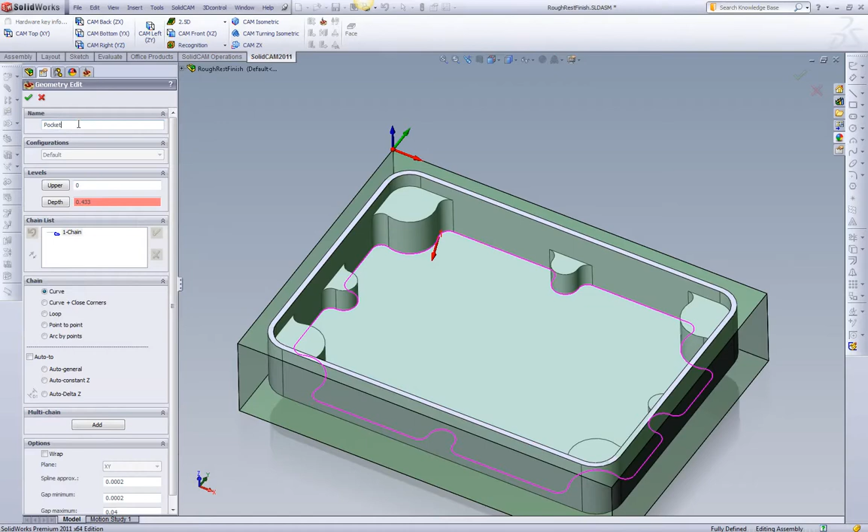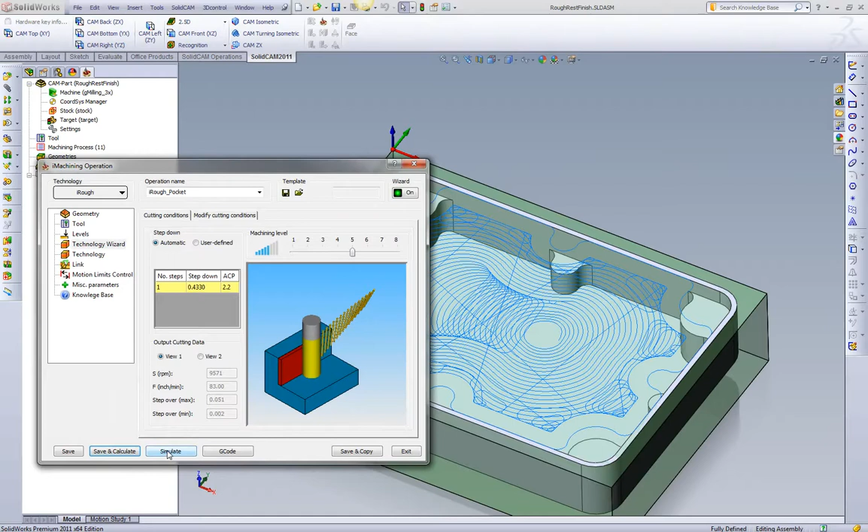We'll go select our tool. The first tool we're going to use is a 1/4 inch end mill. And we're going to use level 5 in our iMachining wizard. We'll take a look at the toolpath. Here we can see it roughed out. We'll take a look at it in Solid Verify.

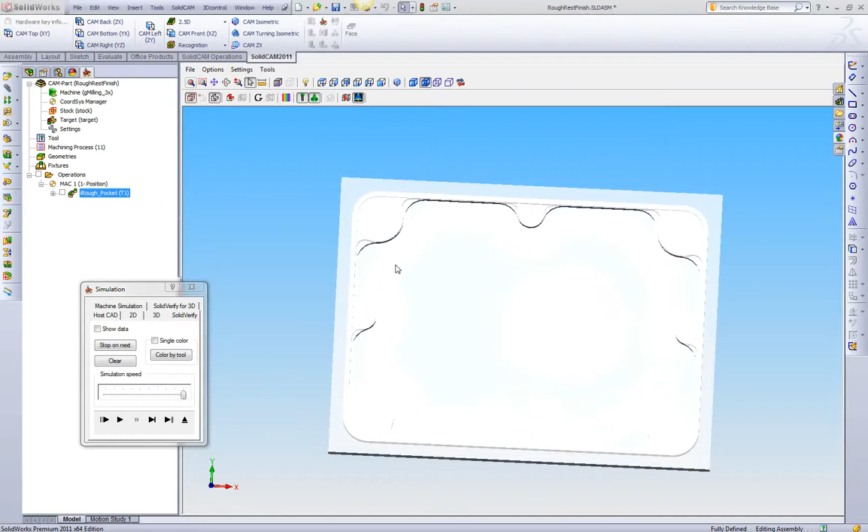If we look at our finished model, we can see that we have material in all the corners and also on the wall. So if we want to rest rough this operation first before we go to finishing, all we do is click Save and Copy. We switch our technology to rest. We go grab our smaller tool. We're going to stick with the same level 5 in our wizard, and we calculate.

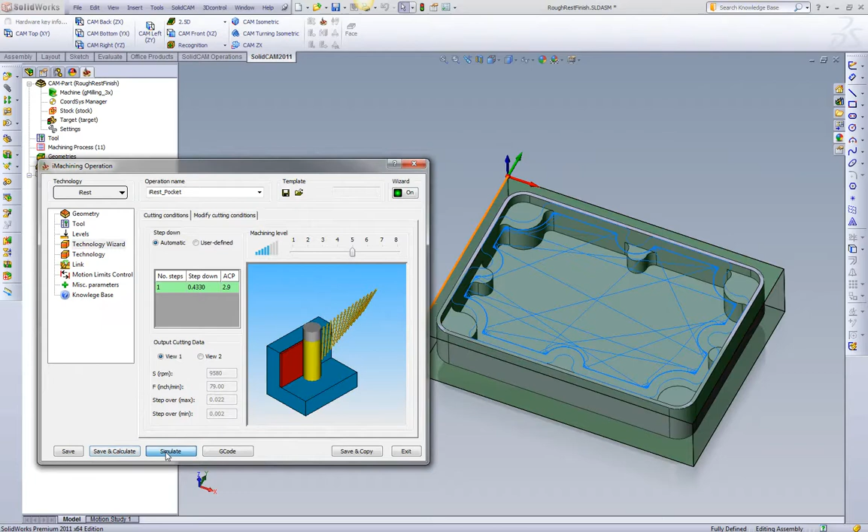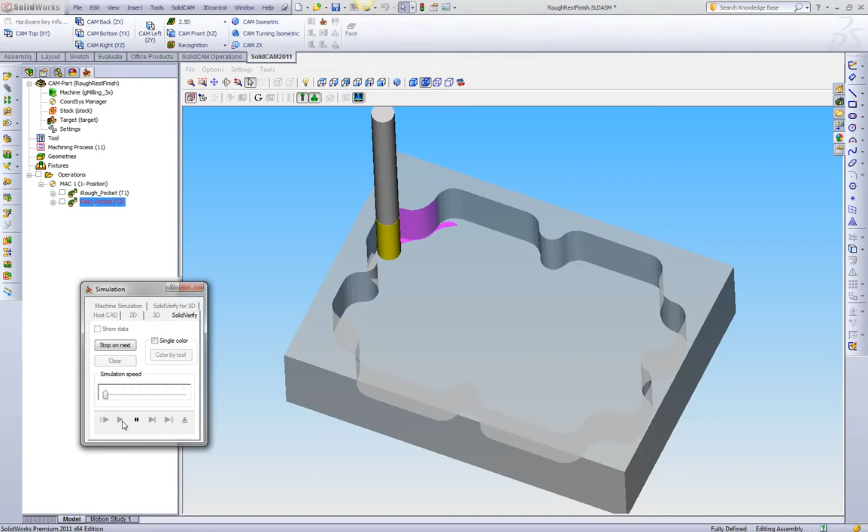iMachining is smart enough to automatically use the last operation as its rest material. If we move to our Solid Verify and slow it down, we can see it now rest roughed the entire area. Now if we slow this down to a very slow time, we can see what's actually happening. The first thing that's happening is it's taking away, in one pass, the leftover material on the wall. As we speed it up, once it finishes with that, it will then move to its corners, taking away all the material in the corners.

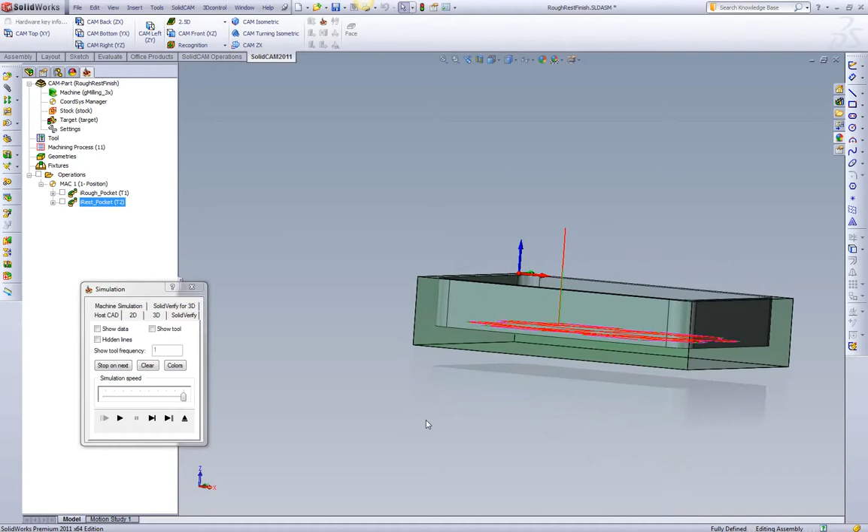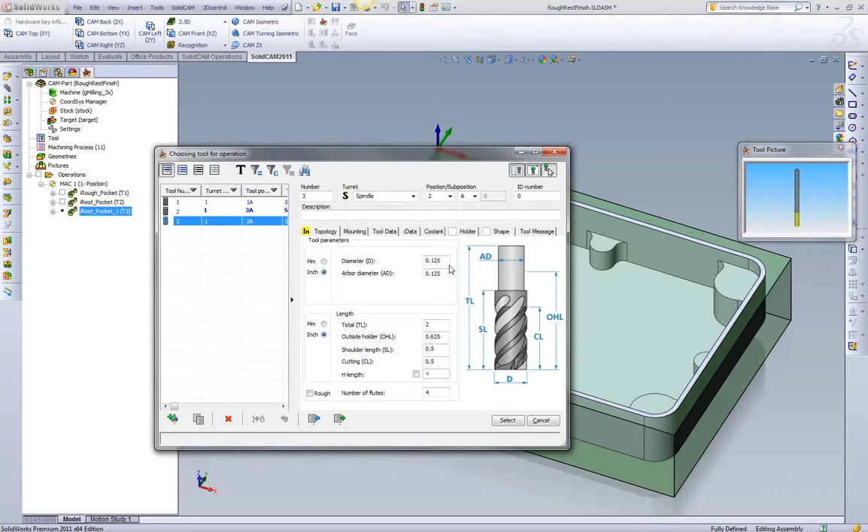If we look at this in the host CAD, as always with an iMachining toolpath, no retracts. Tool stays down, not getting any unnecessary air cuts. Now we want to go to finishing. So we save and copy that operation again. We click finishing. We go to our 1/8 end mill for finishing. We'll stick with our level 5 again, and we'll calculate.

Now finishing is going to do something different than rest roughing. It is going to be based on the rest roughing operation, but what it's going to do first is it's going to clean out all of the areas that are bigger than the wall offset. So what we're doing is we want to be able to take one final pass around the contour at the programmed wall offset.

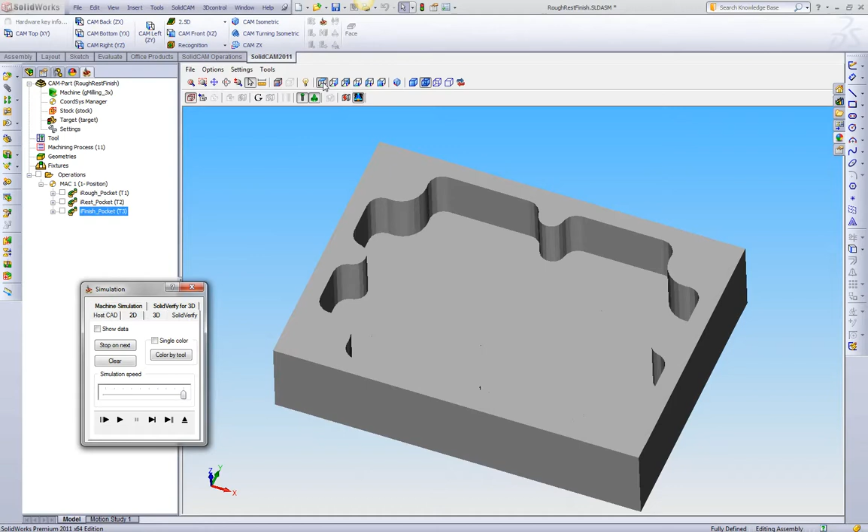So if we go to a top view and look at this, we can see all the corners are being removed first. We'll go back to our isometric. Slow it down. We see all the corners are being removed in preparation for a final finish pass. And then we get our final finish pass at the programmed step over, or wall offset.

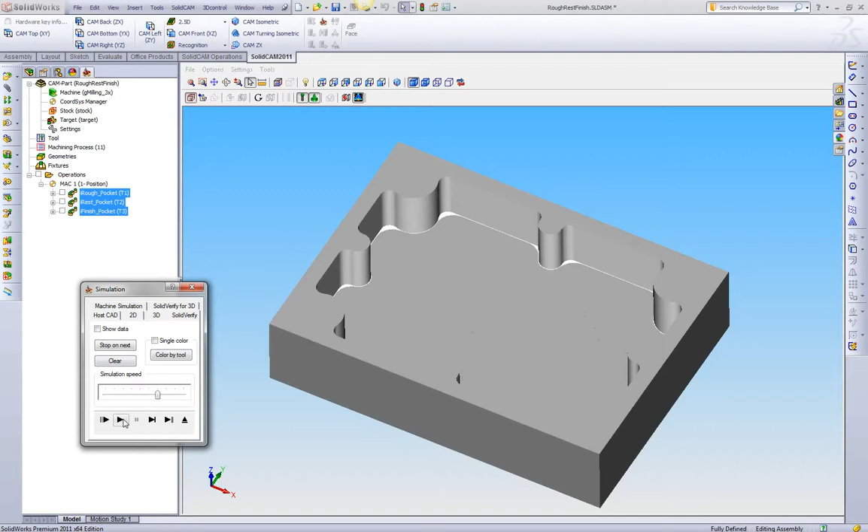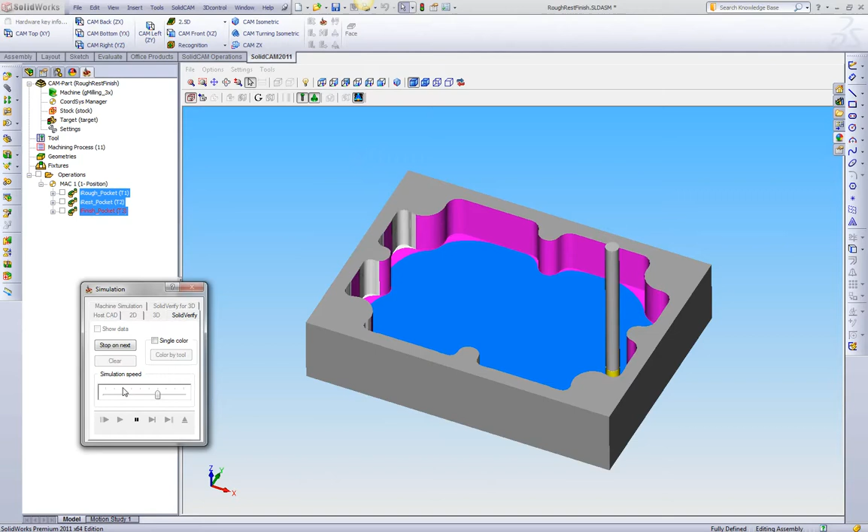If we simulate all three of these together, we'll take a look and see what we get. So we have our roughing toolpath, which is clearing out the bulk of the material. We have rest roughing after this, which is taking a smaller tool and progressively shaving away all of the material, where most of it is left over in the corners in this scenario. And then after the rest roughing is done, we're going to move to our proprietary finishing technology. In our finishing technology, we automatically clean out all the corners and then move to one final pass around the wall.

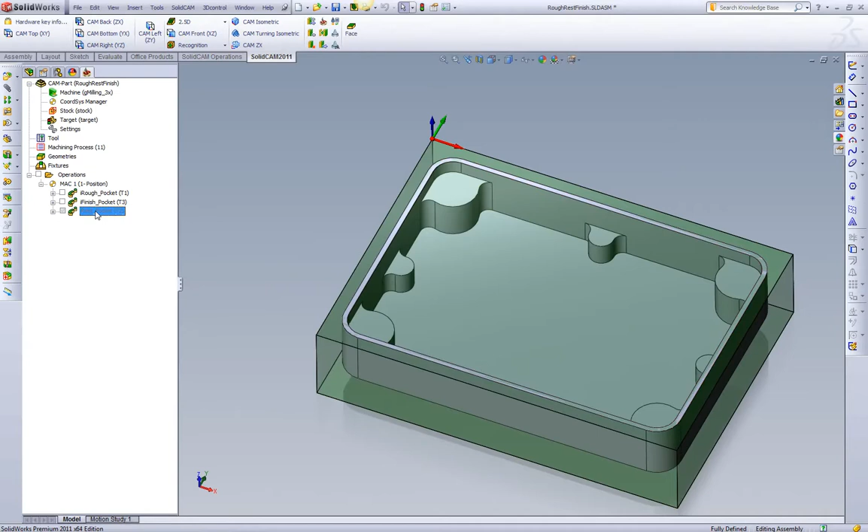Now, a lot of customers go directly from roughing to finishing. So what would happen if we wanted to do that? So what we'll do is we'll suppress this rest roughing operation. We'll drag it to the bottom and we'll go to the finishing. What we're going to do now is tell it to work off of the roughing toolpath. In this instance, we can see that SolidCAM is warning us and telling us that the previous wall offset cannot be greater than the maximum step over.

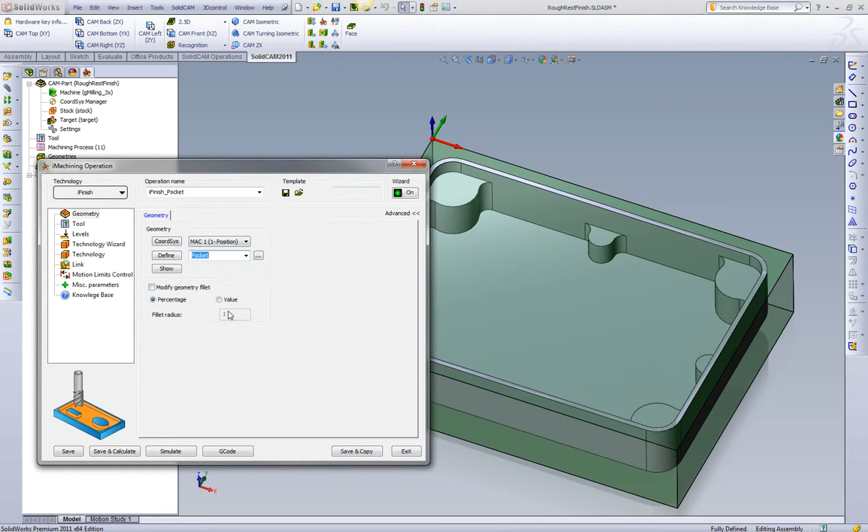So to do this, we're going to go to our roughing operation. We see that we're leaving 10 thousandths on the wall. Naturally, we are not going to take away the full 10 thousandths in one pass with a 1/8 end mill. So we're going to lower this down to 3 thousandths. Calculate our toolpath. We're going to move back to our finishing. Pick the rough pocket. Now when we calculate, we do not get any errors, because now we're roughing to the good wall offset that the finishing tool can take in one pass.

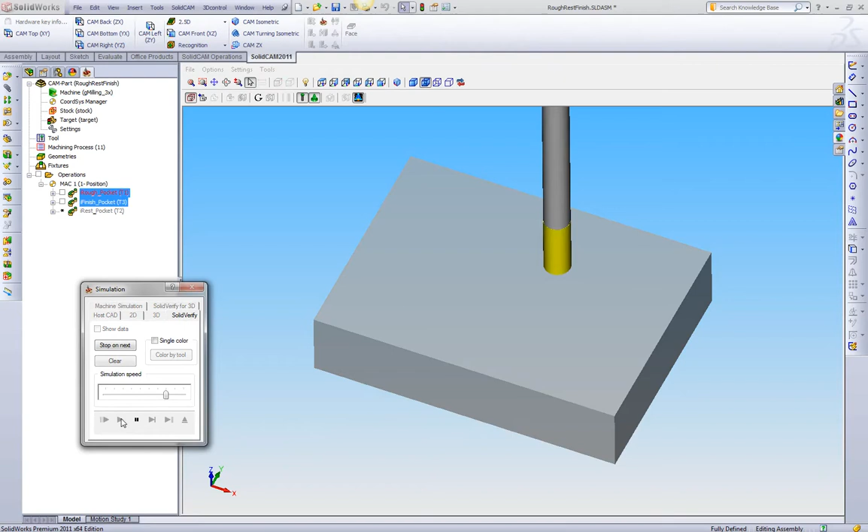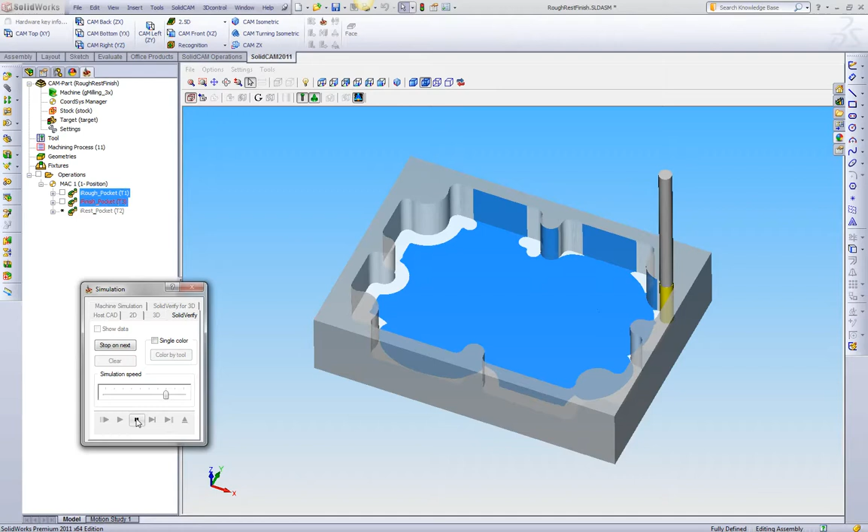Now if we go to our simulation and simulate both of these, we can see here's the roughing toolpath, same as it was before, but now roughing to 3 thousandths. And then after that, the finishing is going to come in to all the corners, finish all the corners to prep the final finish pass to be the step over that we defined. And that's how simple it is to go from roughing, rest roughing to finishing, or you can go directly from roughing to finishing if you like.